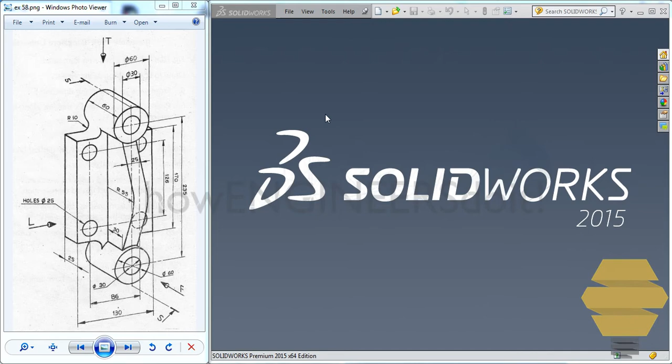In this video, we'll work on exercise number 58. To start off, we'll go to File, New, and double click on the part template. And we have the empty part template open. Let's go to the sketch and start doing the sketch. In this case, we will do it on the right plane. We'll start the sketch by creating this rectangle here. So let's go ahead and create a rectangle.

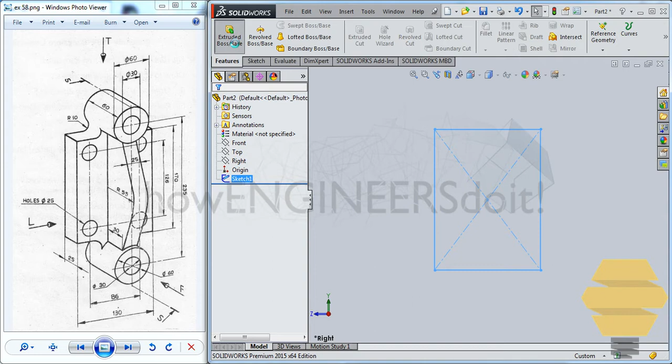In this case, I prefer to do a centered rectangle. So I've drawn a rectangle there. Now let's dimension it. That is 130 by, the height is 170. Now let's exit the sketch. And we'll go for Features, Extruded Boss/Base. The thickness is 25, so let's give 25. Or 12.5 on both sides will also do. Tick mark.

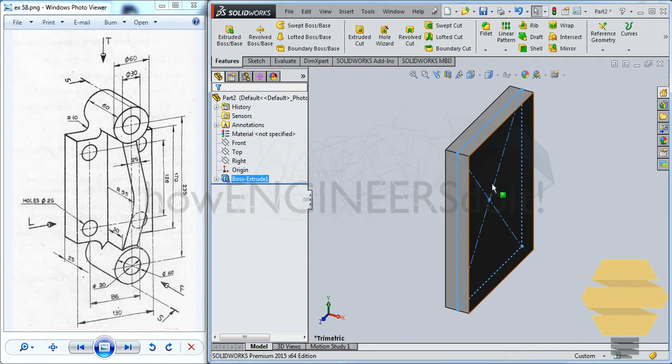It's done. Now we have to create these holes here, right? So let's click on one of the surfaces there, click on sketch, and let's draw one circle. Now let's dimension the circle. The hole will be of diameter how much? 25. So we'll give 25 here, and it's placed at a distance of, we'll just give the distance from the origin here.

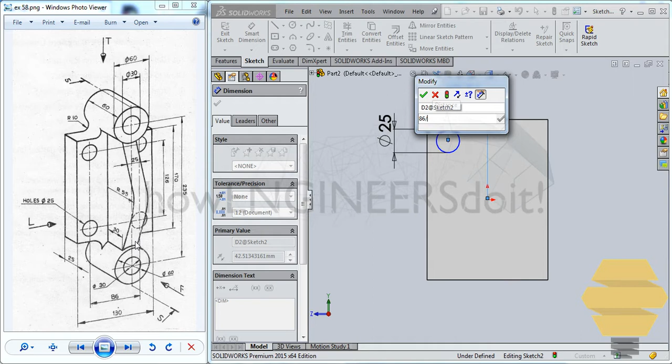So that is 86 by 2. And vertically it is at a distance of 126 divided by 2. Oops. Smart dimension. 126 by 2. Alright, now it's fully constrained. Now let's draw two center lines, one towards this and another one in this direction.

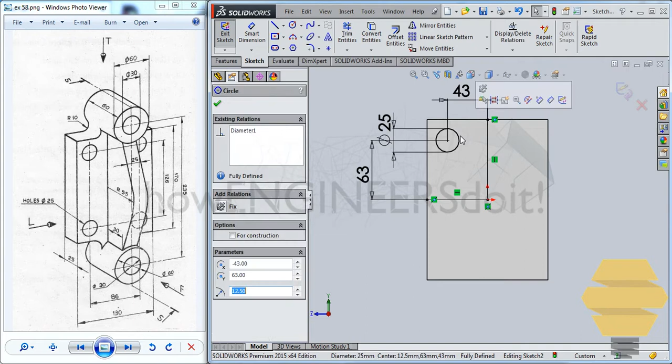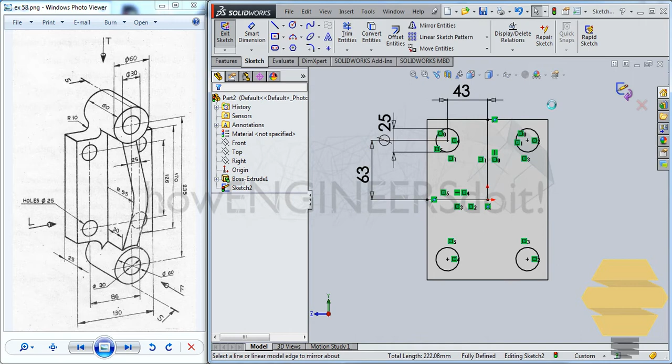Now let's select the already created circle here, go for Mirror Entities and mirror about this axis here. Click on the tick mark. Now let's select both of these circles, go for Mirror Entities and select this axis as the mirror about. Click on the tick mark. Now we have 4 circles created. Now we can exit the sketch and go for Features and Extruded Cut. That will be Up To Next. Click on the tick mark, and we have that done as well.

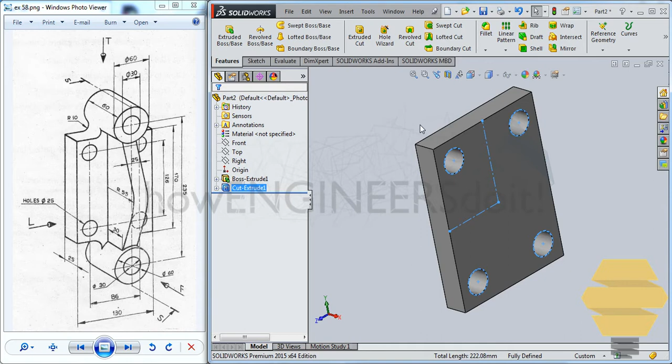Now the next thing to do is to create these circles here, right? Before creating that, I think I would prefer to do these two circles here. This is 25. Okay, this is 60 here, right? So let's select this face right here and click on sketch. And let's simply create two concentric circles, 1 and 2.

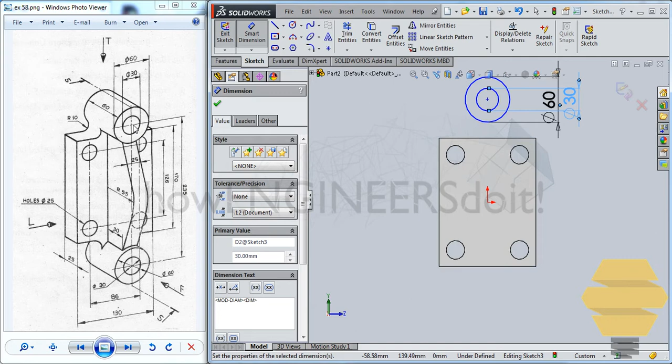Let's give smart dimension. One will be of diameter 60, the other one will be of diameter 30, right? And that is situated at a distance of 235. So that'll be 235 by 2, and this center and the origin will be vertically in the same line. Now we have that done as well.

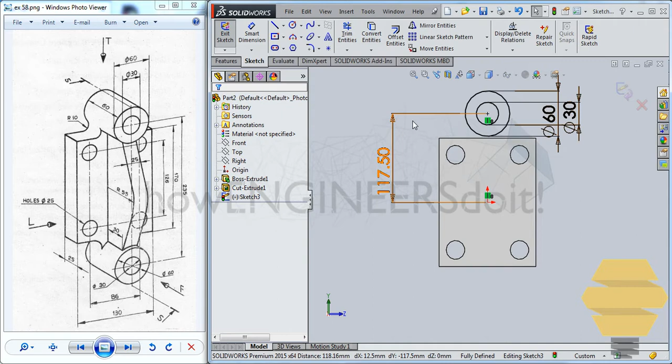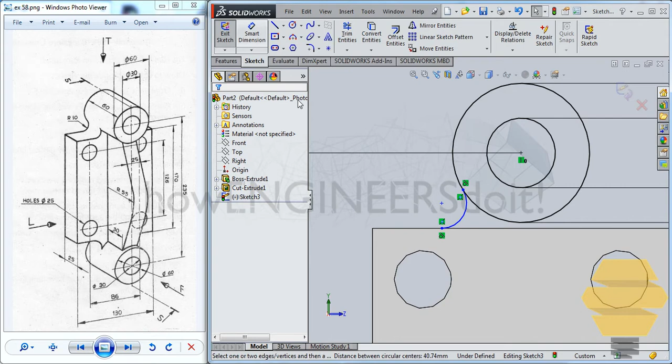Now what we can do next is create a kind of tangency relation over there. For that, I'll create an arc here, place the arc coincident on these 2 points, and give a tangency relation over here, tick mark, and also a tangency relation over here. Good. That is of radius 10, so I'll give that as well, radius 10.

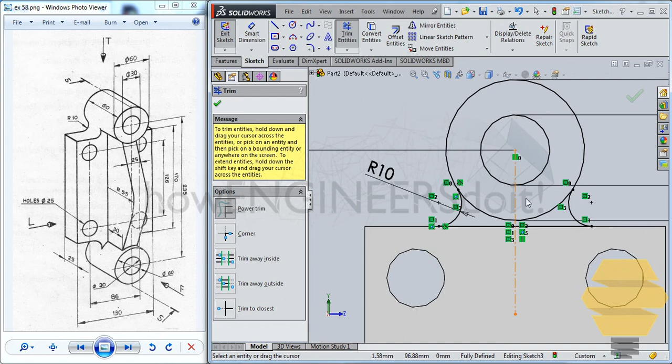Alright, now I'll create an axis line here and select that particular entity. Go for Mirror Entities, select this as the mirror about and click on the tick mark. Finally, I'll draw another line horizontally and trim this portion here and all the unwanted things. And now I'll exit the sketch.

I'll go for features, extrude boss and base in the reverse direction, and that'll be 60 as it's mentioned in the drawing. Oops, it's not given. Now I'll go for edit features and go ahead and give 60 here. Alright, now we have that 60 done.

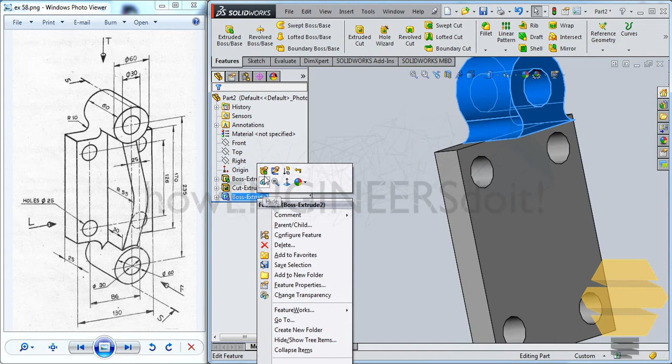So the problem that I'm seeing here is that we cannot directly give 60 there. As you can see, this part is not completely extended. So that's pretty simple. You can just go for edit features and give the thickness as 25. And now what you can do is select this face here and go for the sketch, and this time just select these two and go for convert entities.

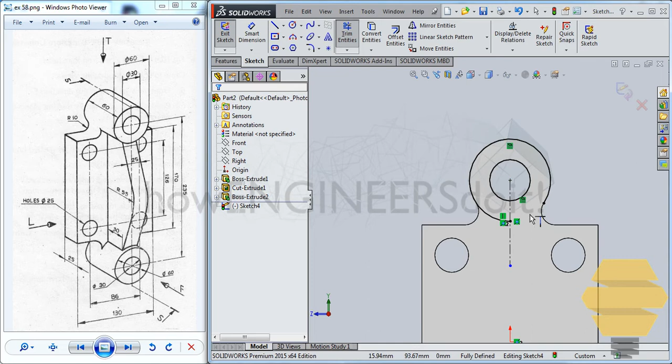And now you can just create a center line here, and you can give extend entities and extend this and extend this portion as well. Sorry, extend this. Alright, just forget about this. I'll delete this and I'll go for a circle and just draw a circle above this.

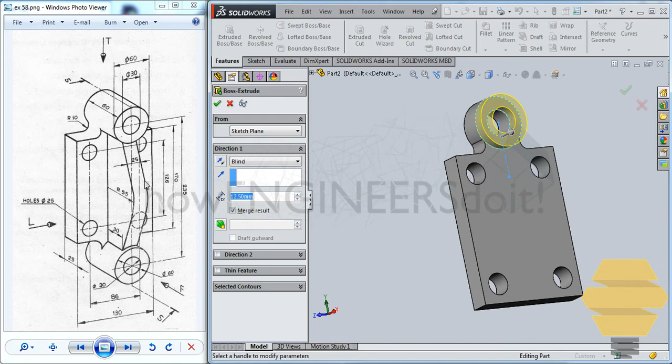That's done, right? Now we can exit the sketch and then go for extrude boss and base, and this length will be 60 minus 25, right? So that is 60 minus 25. Now we have that done as well over there.

Now we can simply select these two, extrude boss and base, and then you can go for mirror over here, and then you can take the mirroring plane as top plane, maybe. Yeah, the top plane. Click on the tick mark. Now we have that done as well, right?

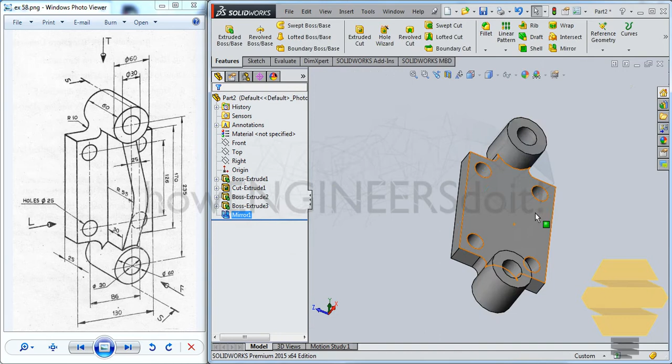Now finally what we're going to do is to create this portion here, right? So to create that, we'll select this face here and go for the sketch. We'll simply draw a corner rectangle. You can simply draw it downwards. Okay, now I'll just draw another center line that is starting from the center to the center. I'll simply select these two lines here and this axis line. I'll go for symmetric, click on the tick mark, and the thickness here is 25, so I'll give 25 here.

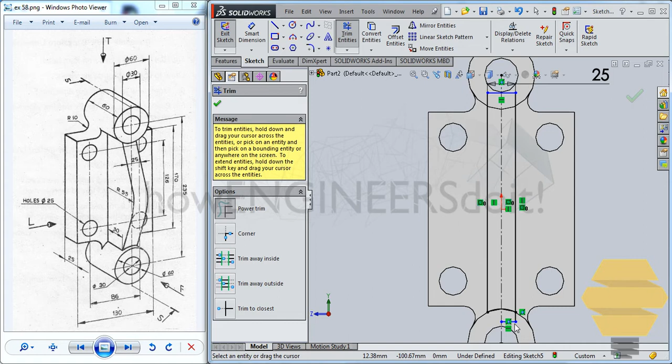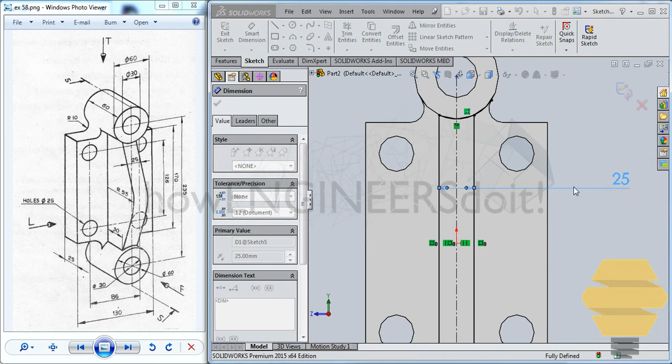Alright, now finally I'll just select this edge here and go for convert entities and use trim to trim all these unwanted portions here. Right, also give convert entities here as well and use trim to trim these unwanted portions. Right, now we have given 25 here. No, it's gone, so we'll just define that 25 once again. Tick mark. Now we have that fully constrained, but we have a little bit of problems here, so I'll just remove that line as well.

Now we have a fully closed loop here, so I'll just exit the sketch now, and then you can go for features, extrude boss and base. I'll extrude it till this 55, right? So I'll just extend till 55. As you can see, it's 55 here, and I'll click on the tick mark here. Now we have that, right?

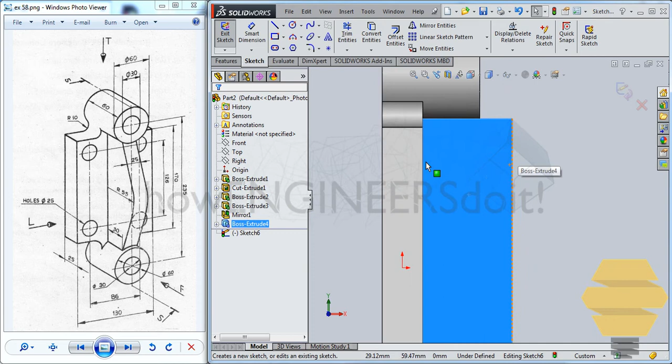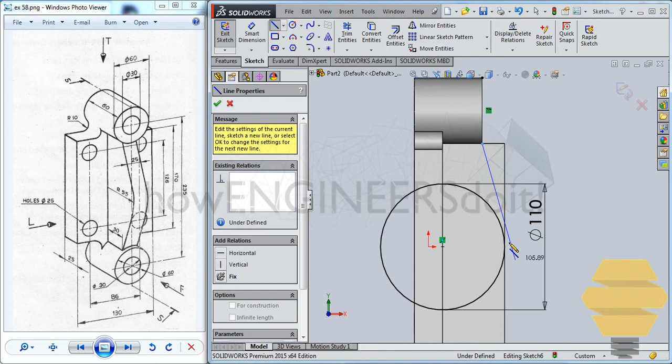I'll select this face and click on the sketch. Now I'll draw a circle from the center, and then I would give 55, that is 110, and what I would do is select this line here, convert entities, and make it for construction. I'll simply draw a line from here to here, and then use tangency relation over here to make it tangent.

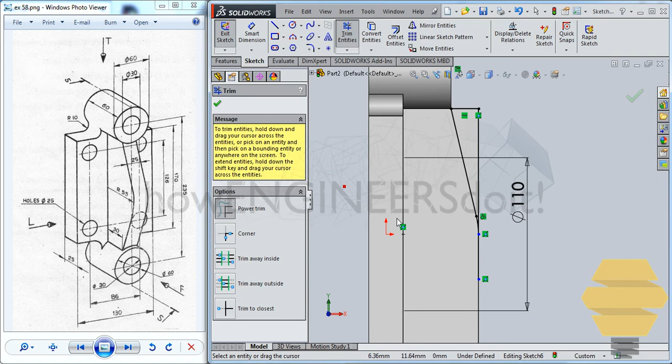I'll just simply trim this portion off, right? Now select the line to take these portions and then trim all the unwanted portions. Yep. Now we have that done, right? Now exit the sketch. Now you can simply use the extruded cut to extrude that portion up to next, right? Tick mark. Now we have that done over there.

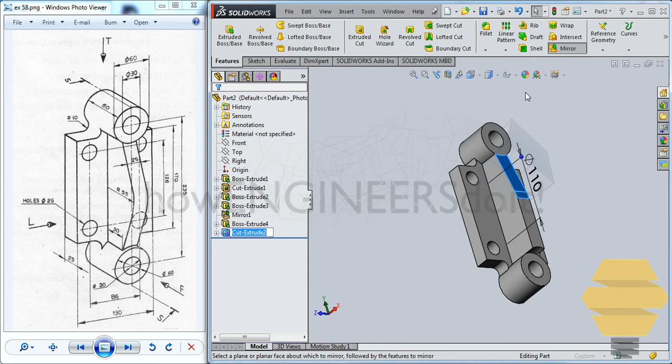Now similarly, select that cut extrude. Now you can simply go for mirror and just mirror it with respect to the top plane. Click on the tick mark, and we have that done on the other side as well.